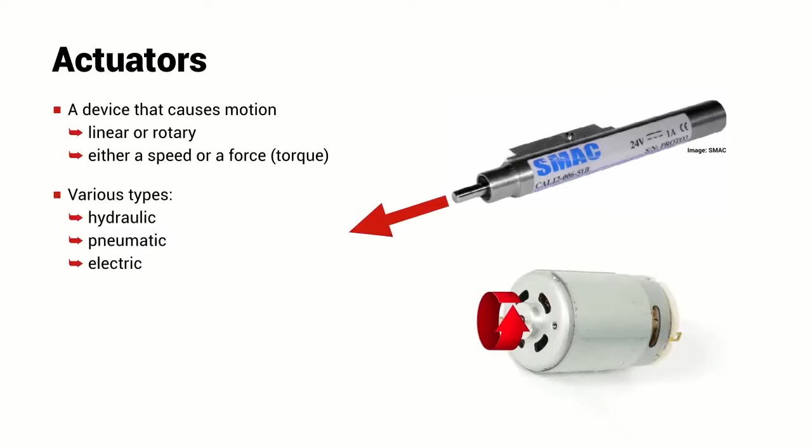We've covered a lot of territory in this lecture. Let's recap some of the more important points. Actuators are devices that cause motion. They can cause linear or rotary motion, and they can generate either a speed or a force. They can be based on a number of different physical principles. They can be hydraulic, pneumatic, or electric. For most robots, electric is the most common type of actuator that's used.

Most robots driven by electric motors employ a reduction gearbox. Electric motors are capable of spinning very, very quickly, but they tend to have relatively low torque. A reduction gearbox amplifies the motor's torque at the expense of the motor's speed.

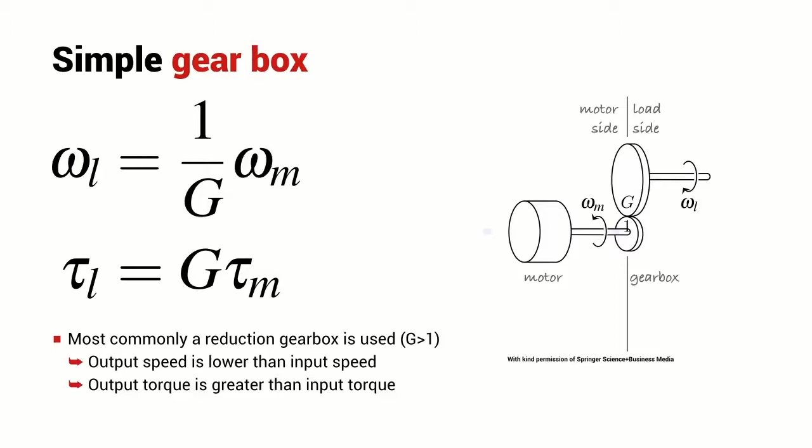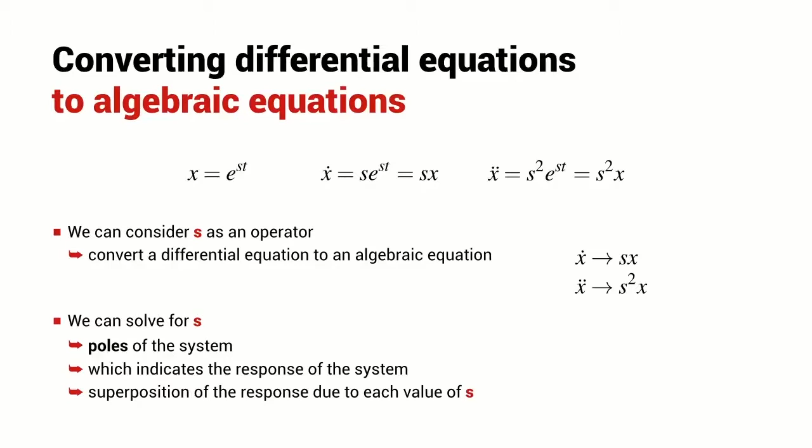We introduced S as an operator to convert a differential equation into an algebraic equation, a characteristic equation which represents the dynamics of an underlying mechanical or electrical system. The roots of the characteristic equation are referred to as the poles of the system, and they describe the response of the system as a function of time. For a system with multiple poles, the overall response is the superposition of the response due to each of the individual poles. We introduced the notion of a transfer function, and in the Laplace domain, it is the ratio of a system's output to its input.

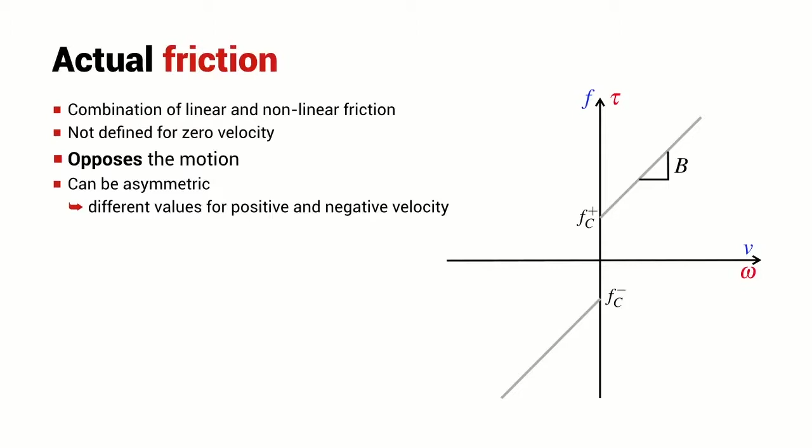Most mechanical systems incorporate friction. There are two important classes of friction, linear friction and nonlinear friction, which is sometimes referred to as Coulomb friction. A realistic friction model looks something like this. It has a positive and negative Coulomb friction value and a linear slope, B. The friction force always opposes the direction of motion, and a friction characteristic like this is not defined for the case of zero velocity. For a current-controlled electrical motor, we can write its transfer function in terms of the motor constant, its inertia, and its friction.

A motor control system needs a means of measuring the angle of the motor shaft. And the most common way this is done is with an incremental encoder, with two light beams shining through slots in a disc attached to the motor shaft. We can analyze these signals to determine the velocity of the motor and the direction of rotation, and by counting the pulses and knowing the direction, we can determine the angle of the motor shaft.

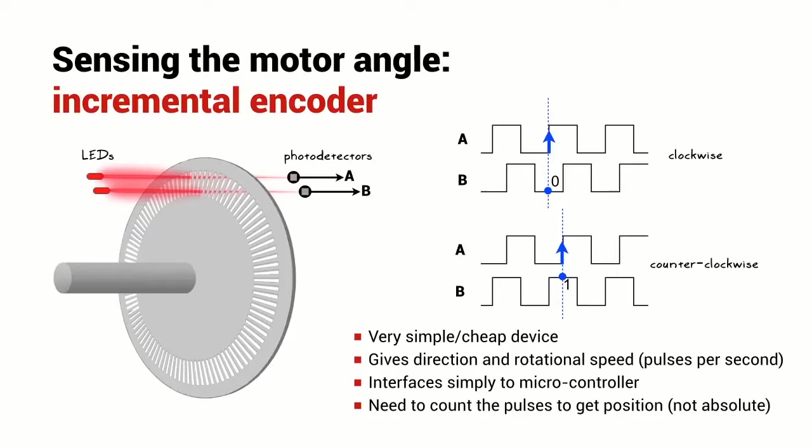We bring a number of these components together to create a robot joint controller. The joint controller itself is typically an algorithm running in an embedded controller. The motor drive is typically an H-bridge circuit comprising 4 electronic switches. These switches can be turned on and off very quickly, which allows us to control not only the direction the current flows through the motor, but the average voltage that the motor experiences. The output of the motor is connected to the robot joint by a mechanical transmission, a reduction gearbox, which amplifies the torque of the motor.

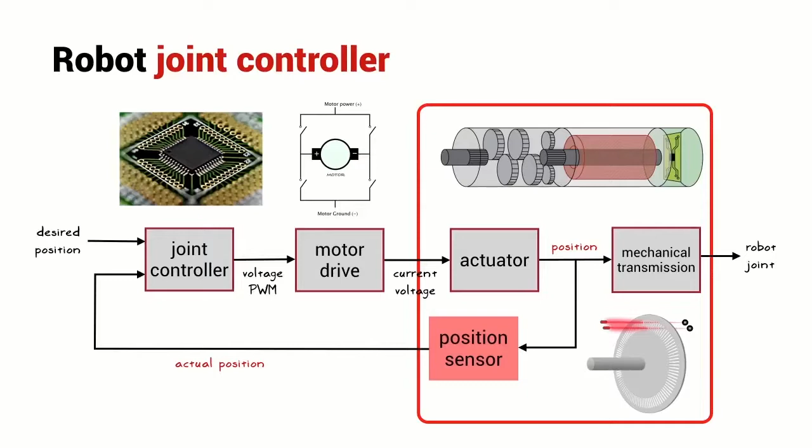The position of the motor is measured with a position sensor. Typically that's an optical incremental encoder. That information is fed back to the joint controller, compared with the desired position, and the error between those two is used to drive the motor either forwards or backwards to minimize the error.

We can create a dynamic model of this robot joint control system. We have a block which represents the joint controller and the negative feedback summing junction. The output of the motor driver is a current which goes into our model of the actuator. The output of that block is the position of the motor. We model the sensor as a gain of 1, which provides the negative feedback signal to the joint controller.

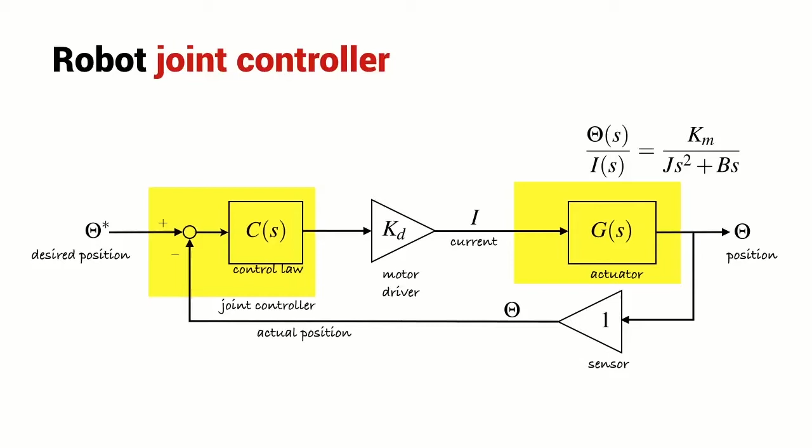The maximum acceleration of a robot joint is a function of the maximum torque that the motor can generate, and that's a function of the motor torque constant and the maximum current that can be fed into the motor. And it's also a function of the inertia that the motor experiences. That inertia has got two components. One component is the motor's own armature inertia, and that's a constant. The other component is the inertia of the link.

In a real robot, the link inertia is highly variable. And that's because in a serial link manipulator, each link has to hold up all of the subsequent links. As the joint angles of all of those outboard links vary with time, so will the inertia that this motor experiences. However, typically there is a gearbox between the motor and the link, and that has the effect of reducing the inertia of the link by a factor of g squared. Now, typically g is a big number, could be 10, could be 100, and that dramatically reduces this variable inertia due to the link configuration.

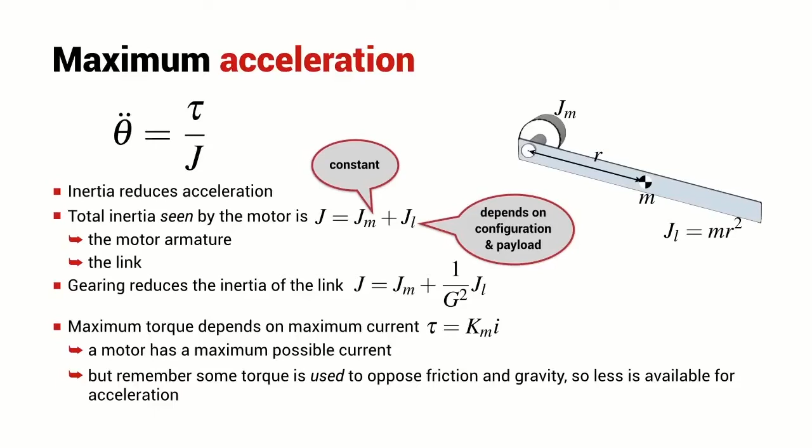Multi-joint robots typically employ what's called independent joint control. So there is a separate robot joint controller for each individual joint. Typically these controllers have a common electronic and software design, and typically only a few parameters in the joint controller need to be changed to accommodate the different sized motors that are fitted to different joints of the robot.